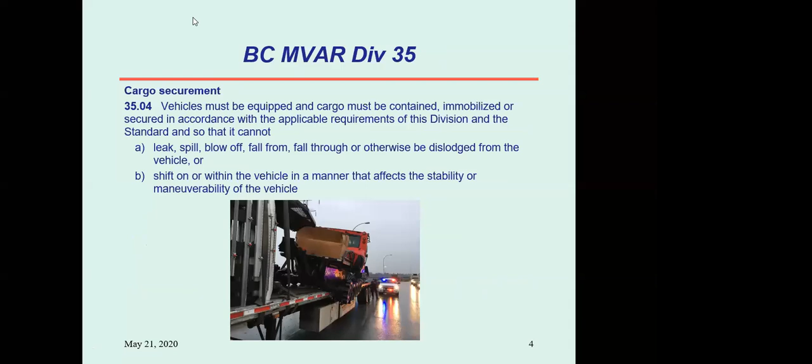There we go. Does that work now? Okay, perfect.

So what we're going to go through today is just a very brief presentation. We only have an hour, and normally the cargo securement program would take several hours or a day or two. So this is just a brief overview, and you're certainly welcome to contact me or any of my colleagues throughout North America. We actually all use the same cargo securement rules. National Safety Code 10 is federal, and it is part of the North American Cargo Securement Agreement that was signed by Canada, the United States, and Mexico back in 2004. So theoretically, all states, provinces, and territories in North America are using the exact same rules for cargo securement.

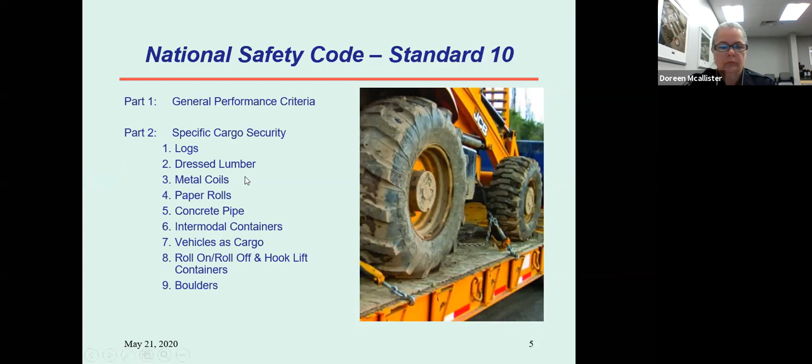One of the things we always want to keep in mind when we're on our way to pick up a piece of freight is what it is. Is it going to be skidded inside an enclosed trailer like a van or a reefer? Or is it going to be a skidded load on an open deck? Or is it just going to be a whole bunch of miscellaneous bits and pieces that we need to consider when thinking about our cargo securement in advance?

The other things we need to think about when loading our cargo is how heavy it is, how big it is, and we need to make sure when we load it on or in the trailer that it's neat and tidy so it can be secured quite easily.

Some considerations we need to think about are where we're going to tie the load to, what we're going to secure it with, whether it's inside an enclosed vehicle or on an open deck, whether the securement device or system we've chosen will be effective, and whether we need some dunnage or spacers on our load.

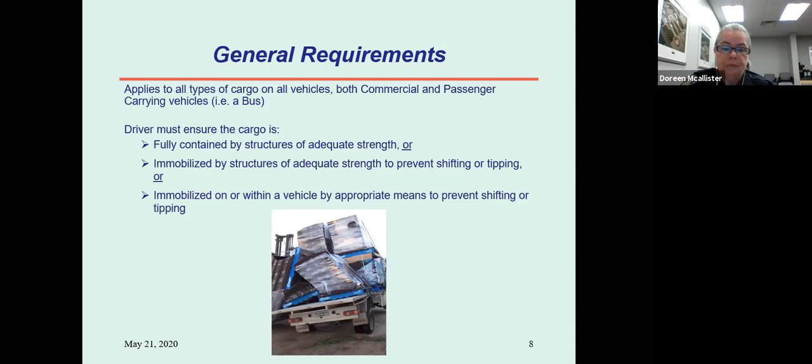Vehicle structures, floors, anchor points, headboards, bulkheads, stakes, posts, and pockets all need to be strong enough. If you've ever looked at a newer trailer, older trailers have them too but they've probably worn off, near the VIN plate or by the dolly legs there's a placard stating the working load limit or working strength of all the pin pockets, winches, and hooks. That will help you determine what you need to do for your cargo securement.

Your cargo securement method must be suited to the type, size, and shape of the cargo. For example, you might not want to use chain if you're hauling peat moss, because the chain will go right through the peat moss bag, as an example.

Tie downs have to be capable of being tightened by the driver, both at the beginning and as the freight is carried down the road, the driver needs to be able to tighten them. Tie downs need to be inside of the rub rails whenever it is practicable to do so.

The rub rails are actually built for protection of your cargo securement. You don't want your straps to get rubbed off when somebody sideswipes you, so you have your straps on the inside of the rub rail whenever possible. You're also going to want to think about whether you need to use some edge protection to protect either your strap or the freight from being damaged.

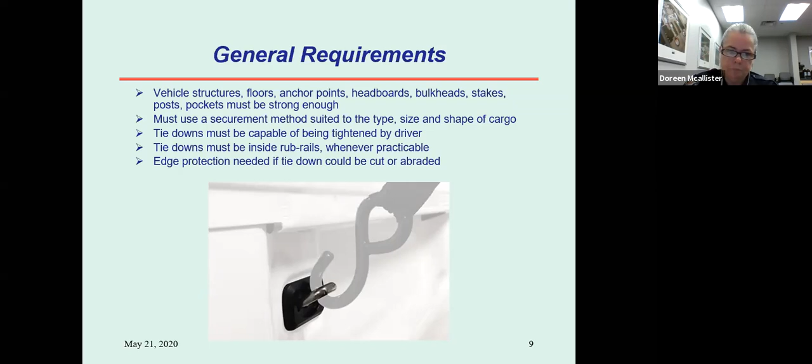A big part of cargo securement is actually a fight against gravity, or in conjunction with gravity. We want to make sure we're preventing our cargo from moving, with at least 20% G-force up. That could be just a tarp on your gravel or a cargo net if you've got stuff in the back of your pickup. We want to protect against 80% forward, 50% rearward, and 50% sideways G-forces. Don't be too concerned with these numbers, however. If you have the right number of cargo securement devices of the right working load limit, then you will meet or exceed the minimum G-forces.

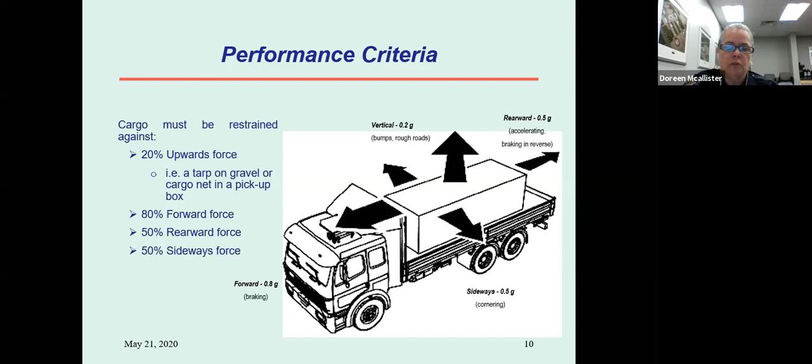Working load limit is something we talk about a lot in cargo securement. It's the maximum load that can be applied to a component of cargo securement during normal service, as assigned by the manufacturer. In the top left picture, you can see a working load limit tag on that Kinedyne strap. Web straps generally have either a tag or it's embedded right into the stitching, using a different colored thread. Sometimes they use both. It's important to note that if we cannot read the working load limit on your strap, we have to count it as a zero. It can still be used, but not as primary securement.

That center picture is the side of a boomer. Boomers all have working load limits written on them as well. The picture in the top right corner is from the front of a trailer. The owner or driver of that trailer knows the working load limit for the chain tie downs on this trailer, which had tie downs embedded right into the deck. Each one of those has a working load limit of 5,400 pounds, for example.

The bottom right corner is a chain that has a working load limit tag on it, and we can read that it's good for 1,635 kilograms. If you look at the chain in the bottom left corner, you can see a tiny nick. In real life, that nick is actually a number, and it tells us what grade of chain that is. Actual chain is the only component that does not have to have a working load limit written on it, because we have a formula for figuring that out, which we'll show you in just a couple of slides.

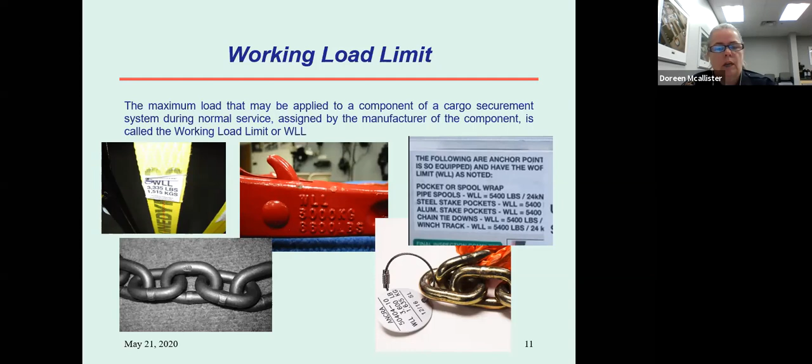The working load limit of the tie down is the lowest working load limit of any of the components and the anchor points. So if the anchor point is good for 5,000 kilograms and the strap is good for 6,000 kilograms, the working load limit for the tie down is 5,000, because that's the lowest of all the components. The aggregate working load limit of all the tie downs used to secure the articles must not be less than half the weight of the articles. So if you want to tie something down that weighs 5,000, you have to have a working load limit of at least 2,500 - half.

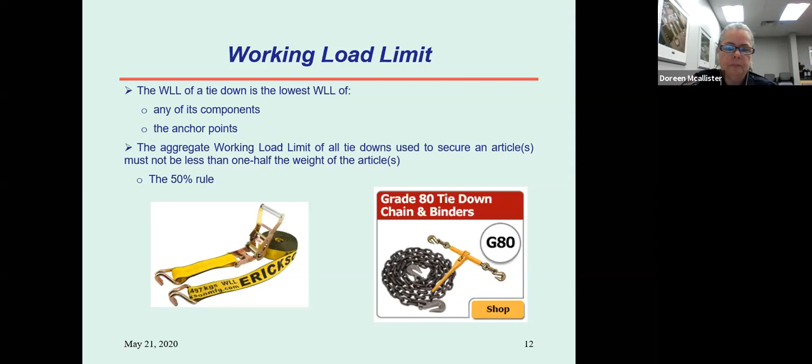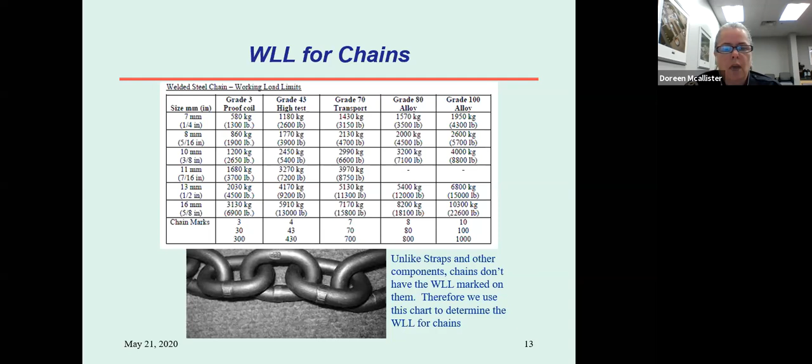For example, if I stop you and you're hauling an excavator, let's say, and you have half-inch grade 70 chain, I know that each one of those grade 70 chains is 5,130 kilograms. So I add up how many chains you've got - let's say you have 4 chains. That would be just over 20,000 kilograms. So the excavator can't be more than 40,000 kilograms.

If you're using a snap boomer for your chains, you need to make sure that the snap boomer is tied closed, either with the tail of the chain, shoelace, haywire. You can get clips that look like oversized diaper pins, carabiner, anything. You just need to make sure that the snap boomer cannot inadvertently open while you're driving down the road. There's nothing in the legislation that prohibits the use of snap boomers. I know a lot of you are in the oil field, and some of your customers may tell you that you cannot use them, and the customer is always right, so that just means you can't use them on their freight or their sites, but there's nothing in law that prohibits you from using a snap boomer.

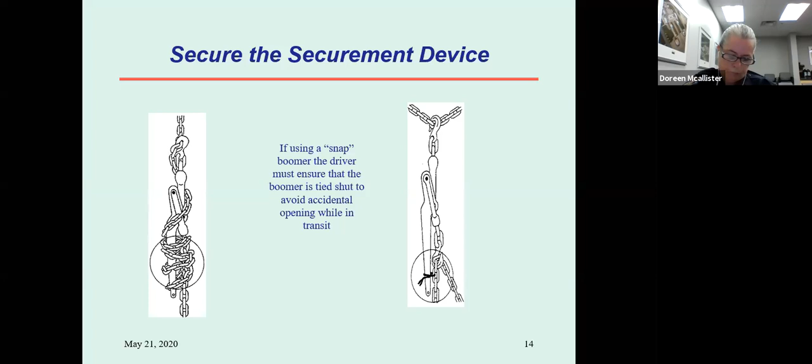So have you or anybody in your organization ever had anything come loose while you've been going down the road?

So it looks like about almost 50% of you have had something come loose while you've been going down the road, and so you know what it's like. It's a bit of an eerie feeling. I know I've had things come loose when I was driving on the highway, and I've certainly seen a lot of it since I've been working for CVSE. It does happen. We just try our best, and we know that you try your best to make sure that it doesn't happen through fault of your own.

So one of the things you need to make sure of is you have the right number of tie downs. We know we have to have 50% working load limit, but we also need a minimum number of tie downs, because we have to cover both weight and length. If the piece of cargo is shorter than 5 feet, and lighter than 500 kilograms, it only needs 1 tie down. If it's 1.52 meters or less in height, and more than 500 kilograms, then you need 2 tie downs. If it's more than 1.52 meters in length but less than 3.04 meters, you need at least 2 tie downs. And if it's more than 3.04 meters, which is 10 feet, you need 2 for the first 10 feet and 1 for each 10 feet after that.

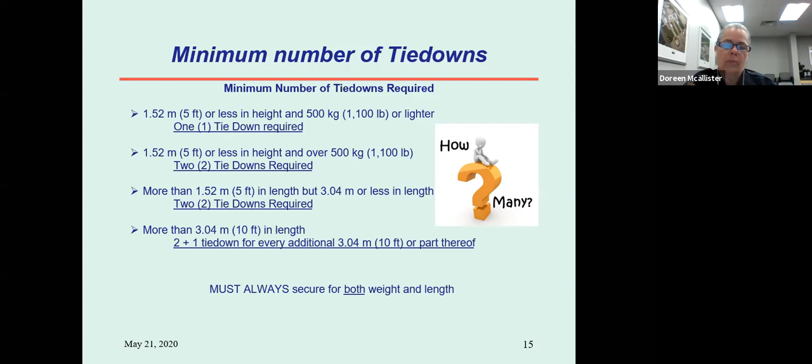You always must secure for both weight and length. An extreme example of that would be a 7-meter piece of PVC pipe that only weighs 30 kilograms. Because it's 7 meters long, you're going to need at least 4 tie downs, because you need 2 for the first 3.04 meters and 1 for each 3.04 meters after that. So that would mean you need at least 4 for that 7-meter piece of PVC pipe.

So as an example, if you have a box that's 5 meters long and weighs about 400 kilograms, how many tie downs will you need?

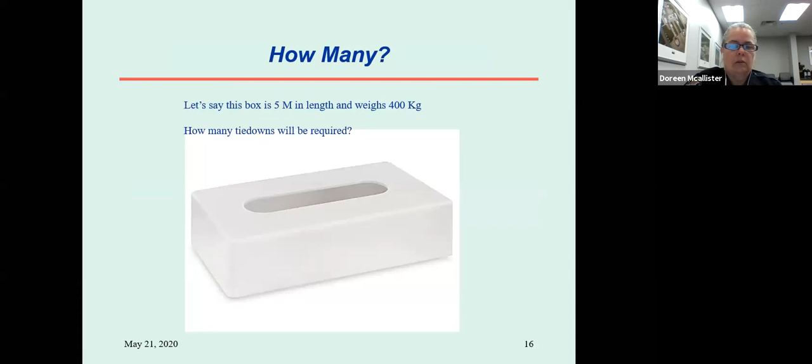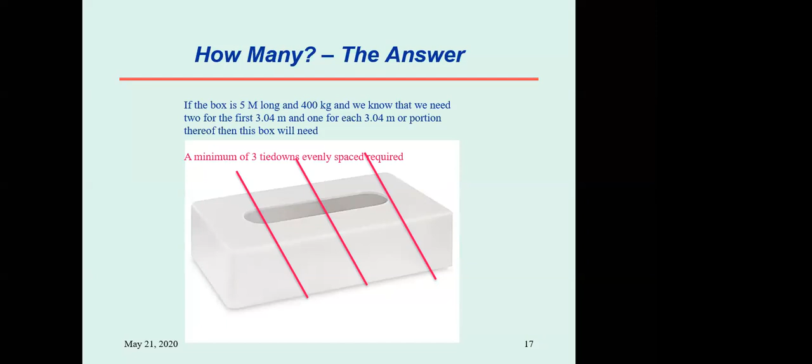So for all of you that thought you needed 3 tie downs, you are correct, because 3.04 would cover the first 2, and then less than 3.04 until you get to the 5-meter mark of how big this box is. That gives you 3 tie downs.

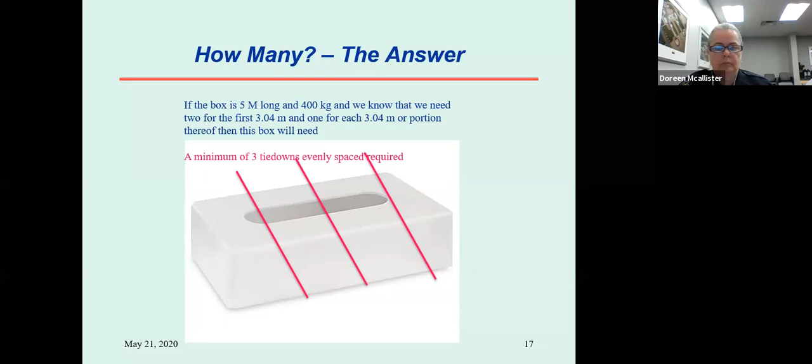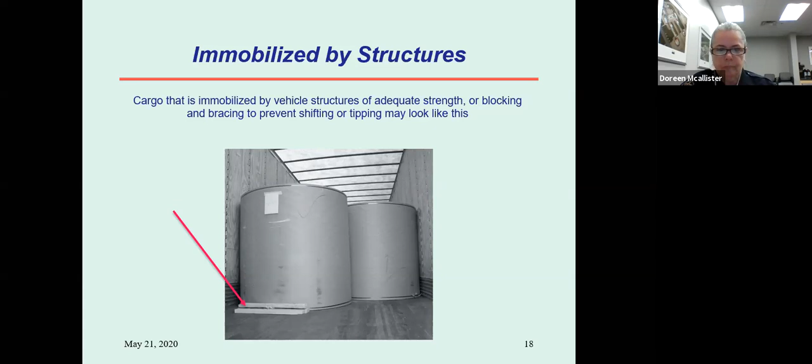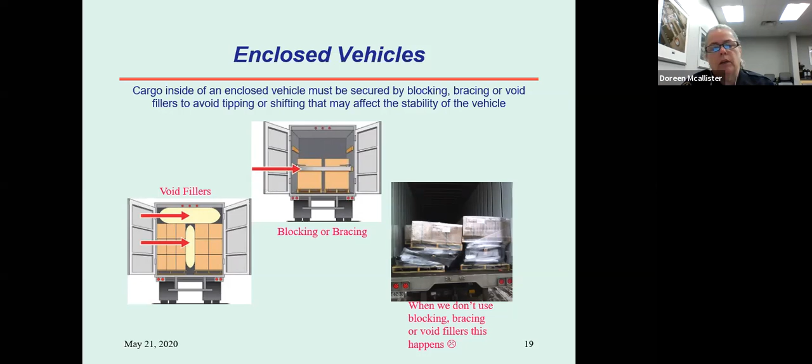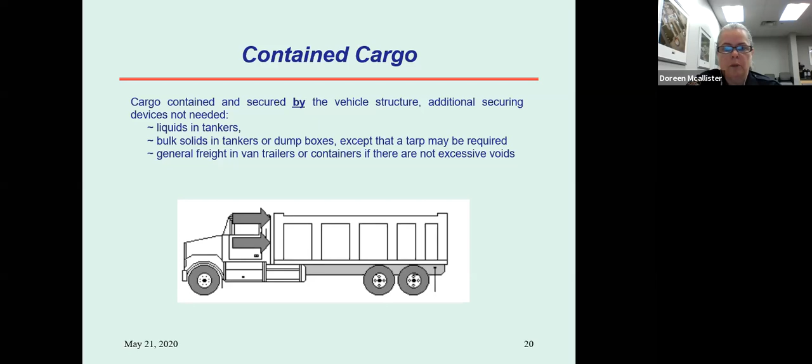Cargo that is contained and secured by the vehicle structure often doesn't need any additional securement devices. For example, liquids in tankers, bulk solids in tankers or dump boxes, except that a tarp might be required if it's in a dump trailer. In general, freight in van trailers and containers when there are not any excessive voids. So you have a 102 trailer and you've got a couple of skids side by side. You're not going to have any excessive voids, because that's why we build the skids the size that they are, so that they fill up when they're placed side by side.

Cargo that is fully contained by structures of adequate strength doesn't need the additional cargo securement, except, as I said before, you might need to be putting a tarp on your aggregate.

Doreen, there's a couple questions on the chat there. One is, what's better, chain or straps? How do we ensure chains are correctly checked for damage?

As far as chains or straps, which choice you get, it's going to depend on what the cargo actually is. There's nothing in legislation that says that you must always use one or the other, with the exception of crushed cars. Crushed cars, you must use either chain or cable. You cannot use strap. Other than that, it's really a driver's choice, and lots of times it's going to depend on what the actual cargo is. Like I said, you're not going to put chain over compressed bags of sod, because you're just going to break that plastic, and the sod is going to be all over the place and not on your trailer. You're going to want to use straps and dunnage or corner boards. So it really depends on what it is that you're hauling.

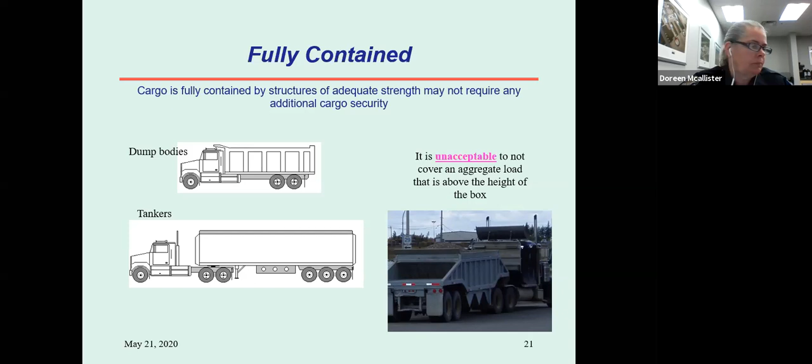Okay, thanks. I'll let you summarize the other questions at the end of your presentation or wherever it's convenient. Okay.

Cargo that is restrained against movement in at least one direction by vehicle structure, such as the headboards or bulkheads, you would reduce the number of tie downs by 1, but you still have to have at least 1. So if the skid or other cargo is abutted against a rated bulkhead or abutted against another piece of cargo, if you've got 2 skids, one in front, one behind, the second one is abutted against, is touching the one in front of it, it would only need 1 tie down. The front one would need 2, but the second one would only need 1.

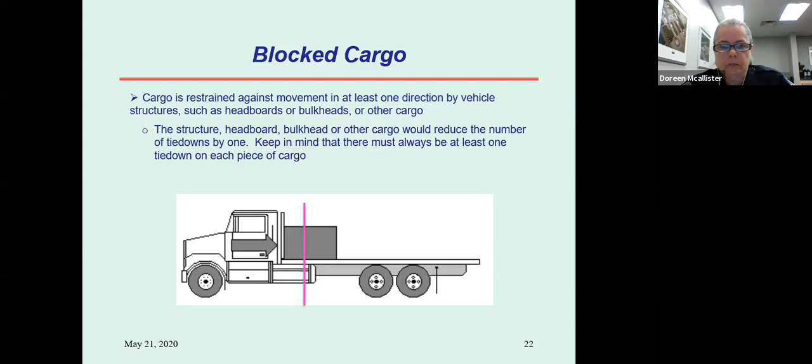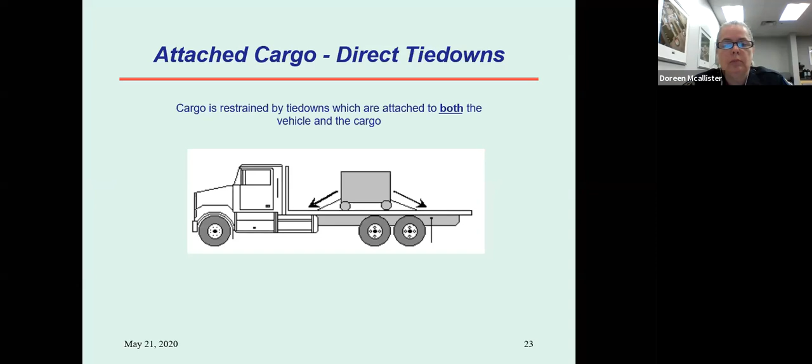Sometimes in cargo securement, you will hear us use terms like direct tie downs and indirect tie downs. So just a really quick definition: a direct tie down is tied from the cargo to the vehicle. An example of that would be integral locking devices, for example, in a garbage bin or an intermodal container.

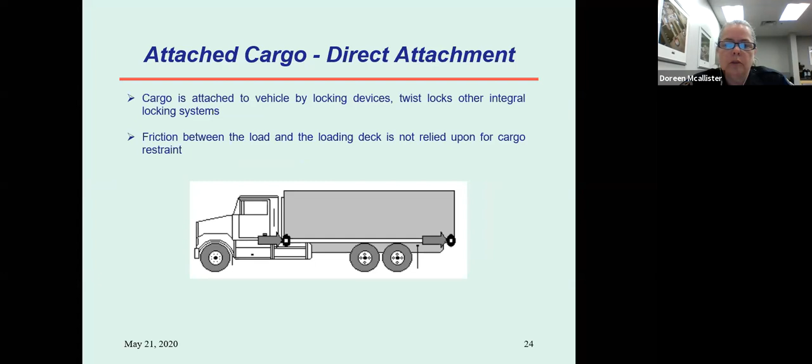The friction between the load and the loading deck is not relied upon for cargo securement. We use the integral locking devices as direct attachments.

Indirect tie downs would be where you put the tie down over top of the cargo or through the cargo and hold it down to assist against the G-forces, ensuring that the load does not fall from the vehicle under normal operating conditions. It's important to remember that cargo securement requirements apply up to the point of impact.

If something tragic happens and your cargo falls off after the incident, unless we determine that the reason for the incident was because the cargo was not secured appropriately to start with, you're not going to get in more trouble if it fell off after you crashed.

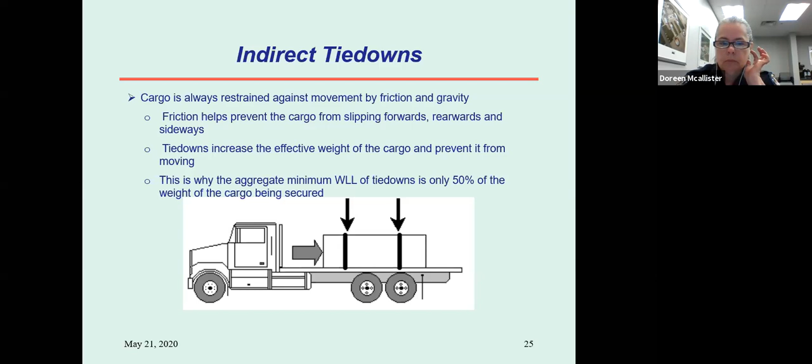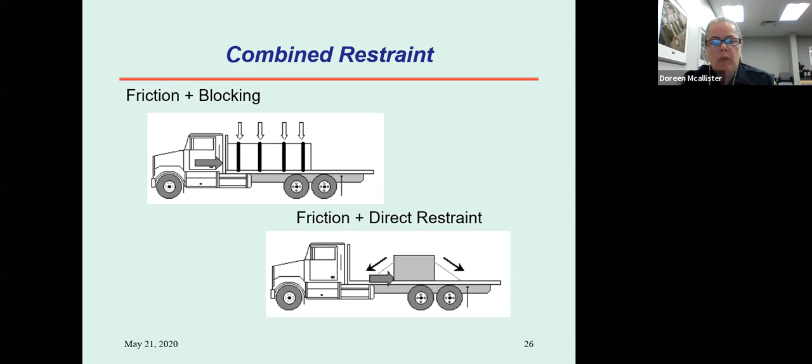So combined restraint would combine blocking and friction, or friction and direct restraint. The important part is to remember that you don't want it moving while you're going down the road.

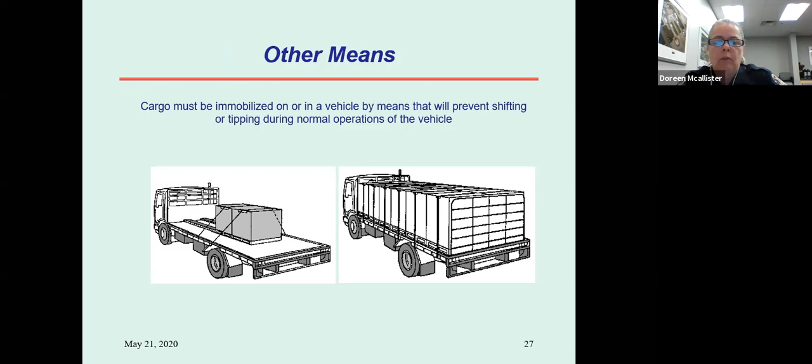Other means could be inside of bins. The picture on the right-hand side there is bulk bins, so there's cargo inside of the bins. They are tied, they can't leave the bin, and then the bin is tied down.

The important part is to remember that there are the right number of tie downs with the appropriate working load limit.

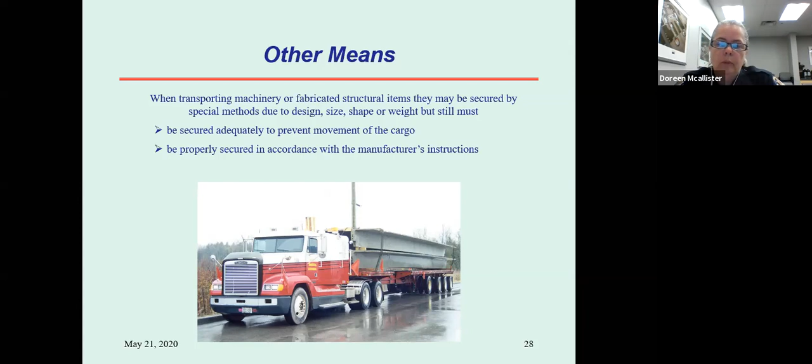So rub rails are something that people really need to pay attention to. I'm sure that you've all seen trailers that have rub rails that are a little bit wibbly and wobbly, and that's generally because people have tied to the rub rails in the past and it has bent the rail.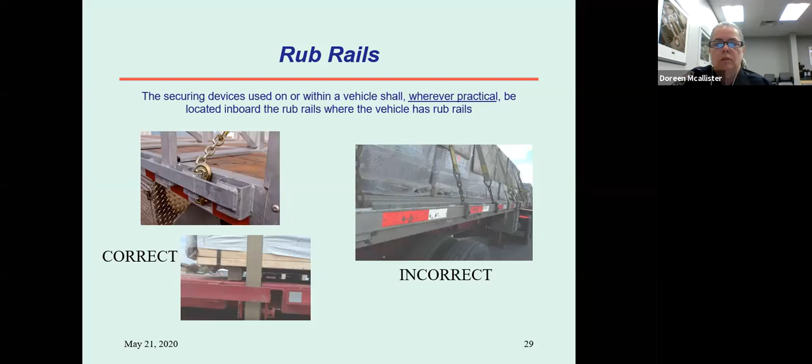So you always want to make sure whenever it is possible and practicable that you've got the hook on the posts on the stake pockets, or if you have to, put them down onto the frame, and you always want them inside of the rub rail whenever possible so that the strap or chain doesn't get damaged or hit when somebody sideswipes you on the Highway 2 between Calgary and Edmonton.

So single articles of cargo are fairly easy. It's the pallets of miscellaneous things that make it a little bit more complicated sometimes.

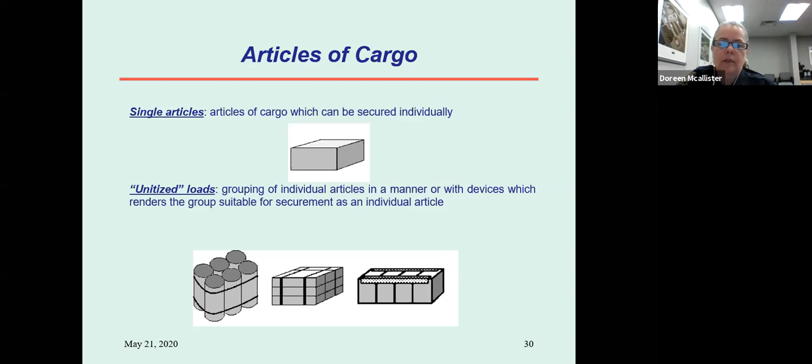But what you can do is unitize that skid of freight by some banding. That heavy duty poly that lots of places use will make it one article and make it a lot easier to tie down. That way, it'll make that skid of brick, for example, much easier to tie down.

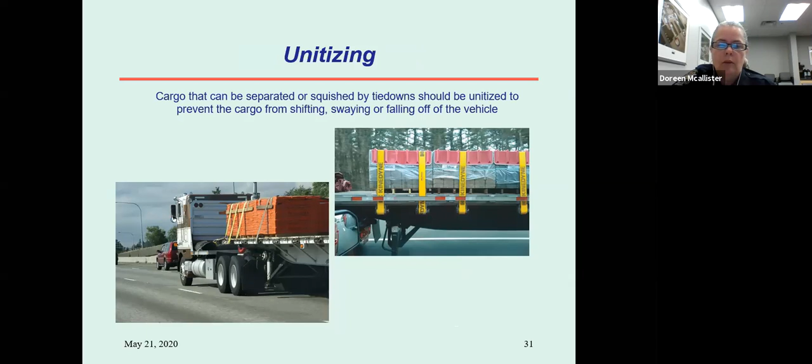If you look at these two pictures, in the picture on the left, he's got some boards tied together with some old straps, and that's unitized the load. In the picture on the right, he's got some corner boards that he's using to unitize that brick, plus it was poly wrapped, so that way it's just one skid rather than 18 pieces of brick that you're trying to tie down.

When the articles are round, that's when you really need to make sure that they're blocked and braced. So this would be for pipe and paper rolls, coil rolls. You want to put some blocking or bracing on the bottom to prevent it from rolling.

And this is one of the times when we do want to see a 45-degree angle on your chains. Straps generally aren't going to be used on this type of freight, and that's just because it's too easy for the straps to get damaged, and also they might not be heavy enough depending on what it is that you're hauling. Chains are just sometimes easier with these types of things.

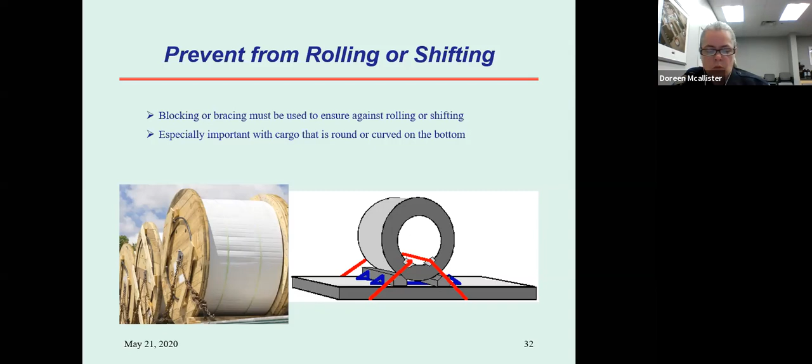But you're going to want to put some corner boards or some edge protection. In this example on the right-hand side, the edge protection is actually protecting the freight, not the chain. You don't want to damage your client's product that he's paying you to haul.

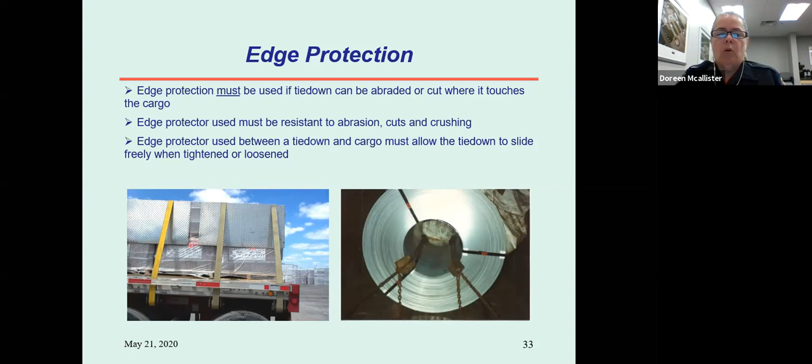Edge protection is used to prevent abrading of your straps. It can be anything, like what's shown in these examples. The one on the right is actually some old straps that have been folded up. You can use carpet, or buy plastic or metal corners that go under your straps. Anything at all that will prevent your straps from getting cut while going down the road or tightening your load.

Tie downs need to be able to be tightened, and the driver must be able to tighten them while en route. Tension requirements do not apply to steel strapping because those are fused together. Steel strapping is only used for unitizing cargo anyway, not as the primary means of cargo securement.

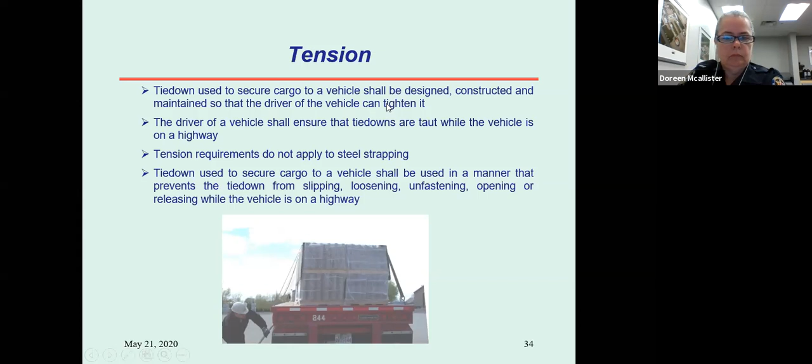The driver needs to stop and check his cargo securement at fairly regular intervals. Within the first 80 kilometers of the trip, he needs to stop and check that everything is still the way it was when he left the yard. Then at each change of duty status, after 3 hours of driving or after 240 kilometers, the driver needs to stop and check all of his cargo securement, making sure the load is still not falling off or out of the vehicle.

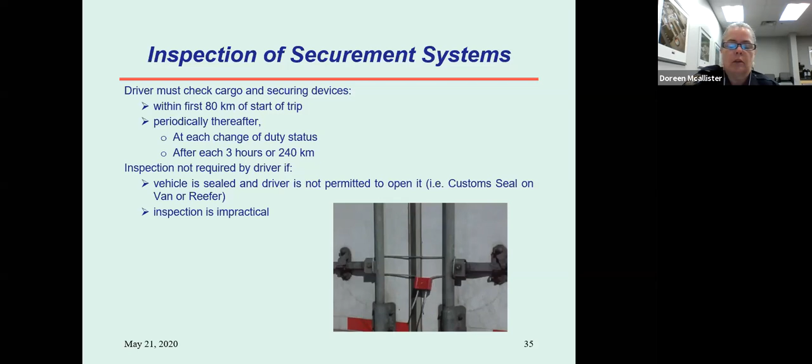There are a couple of times when a driver is not required to. One is if they're hauling an enclosed vehicle, a container, van, or reefer with a US or Canada customs seal on it - the driver is prohibited from opening that seal because of immigration or freight rules with customs. Or if the inspection is impractical, for example if you're hauling a tank.

That concludes all of part one. The next few slides cover cargo specific commodities. The first one we'll look at more closely this morning is lumber, which is section 46 in the NSC 10.

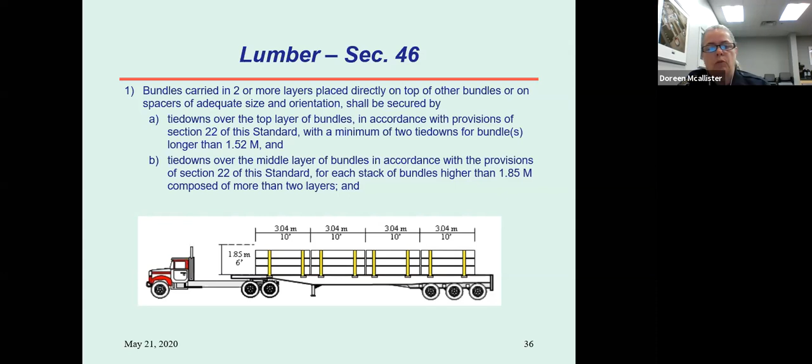However, if you look at this picture, there are 3 lifts of lumber. So the bottom two lifts are tied, and then the top lift is tied as if the other ones weren't even there.

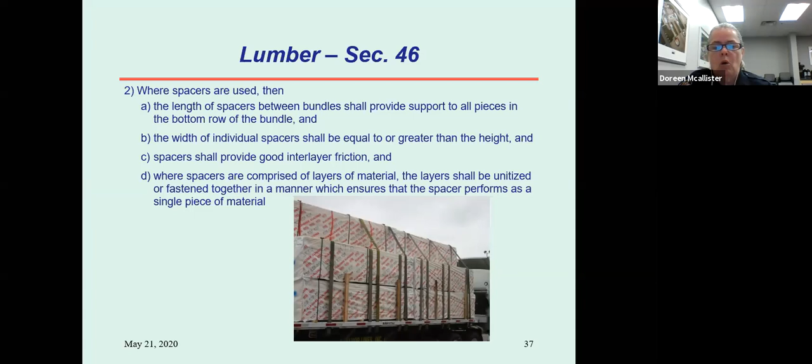If spacers are used in between the lifts, you need to ensure the spacers won't compact and that they're at least as long as the freight they're spacing. For example, you wouldn't want spacers underneath this 12-foot lumber that are only 8 feet long or wide. It needs to run from one end to the other, or from one side to the other, if spacers are being used.

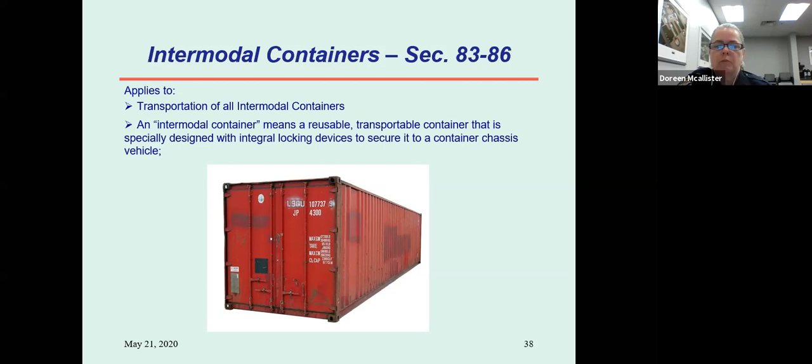Intermodal containers, otherwise known as CANs to everybody else, are reusable and generally transported on container chassis, but not always. If you are hauling one on a container chassis, all four locks must be fully engaged.

For the majority of you here today, you're probably hauling lots of these intermodal containers on open deck trailers, flat decks or step decks. You need to ensure all four corners are fully supported by the vehicle if it's loaded. If it is empty, a maximum of 1.5 meter rear overhang is permitted.

If they're on an open deck trailer, they need to be secured by chains or wire rope on all four corners, or if you're tying to the top four corners - and I don't believe I've ever seen anybody tie to the top corners - that's one of the few times where cross-chaining is a requirement.

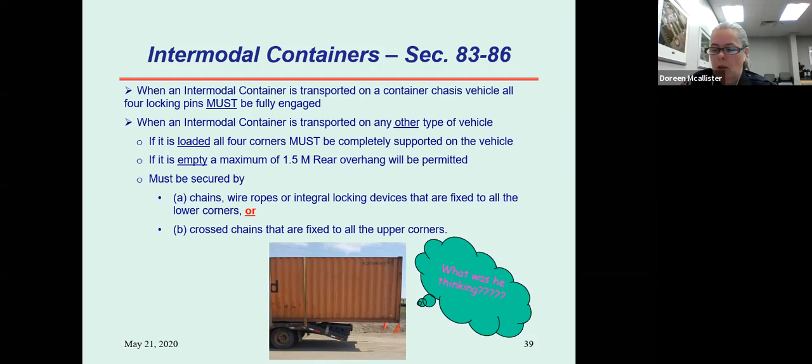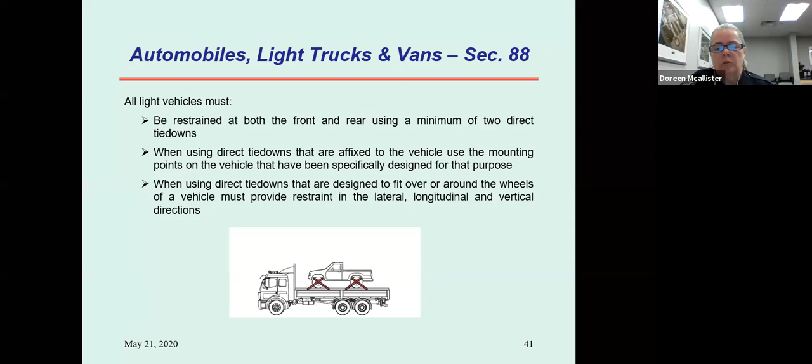So the tie-downs must be attached to the vehicle, to the mounting points that are specifically designed by the manufacturer for that purpose. If they are using the wheel socks, then they must also provide lateral, longitudinal, and vertical cargo securement.

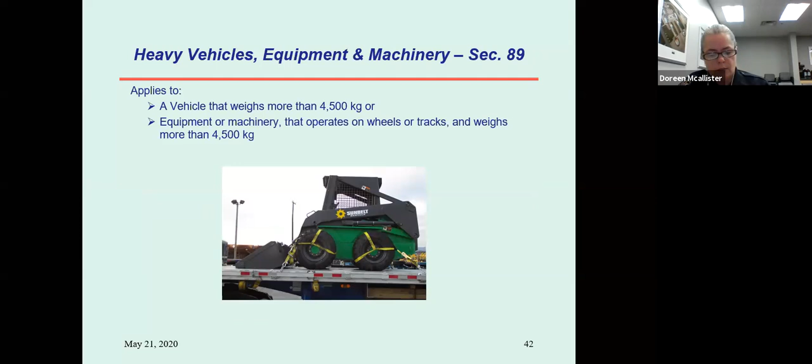Heavy vehicles are Section 89 in the NSC Standard 10, and they're for any vehicles that are more than 4,500 kilograms. And they include machinery that operates on wheels and tracks. They need to be secured with at least 4 tie-downs, and each one of those tie-downs must have a working load limit of at least 2,268 kilograms. The tie-downs are at the front and the rear or on the mounting points designed by the manufacturer. A lot of heavy equipment has actual load hooks built right onto them by the manufacturer.

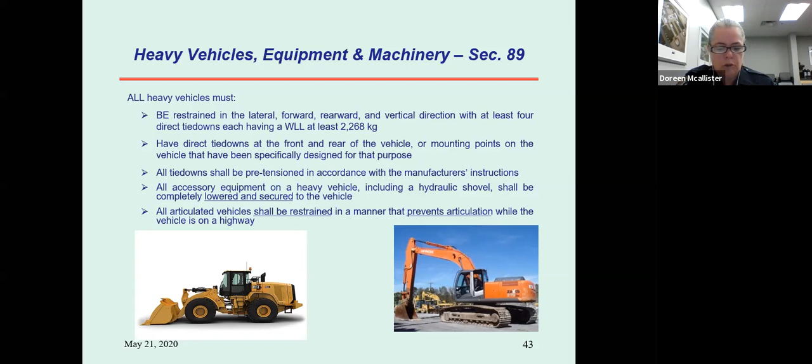Any accessory equipment must be completely lowered and secured to the vehicle. And if it has an articulation point, like the front end loader on the left-hand side or a rock truck, that articulation point needs to be locked with the pin. Or if the pin has been lost or missing, then you need to put chains through that articulation point. You don't want that piece of machinery bending on you while you're driving down the road.

Crushed cars are flattened cars, so they're not cubes, they've only been flattened by mechanical means, and they're on their way to the recycling place where they're going to strip them and separate them out.

Web strapping cannot be used on crushed cars. It must be chain or wire rope. Each one must have at least a working load limit of 2268 kilograms, and there has to be at least 4 on each stack. And then there has to be netting or some other device surrounding the load to ensure that debris doesn't fly off while you're going down the road.

Sections 94 to 96 of the National Safety Code Standard 10 are for roll-on and roll-off and hook lift bins. They have to be secured at the front with either the lifting device or the stops, and at the back within 2 meters of the rear of the container, they must have 1 indirect tie-down or 2 tie-downs secured to the side rail of the vehicle chassis and the container chassis at the same time, or 2 tie-downs lengthways securing the container to the vehicle side rails, or the 2 hooks that you'll see a lot on garbage bins. There's actually hooks at the back of the truck that hook onto the bin.

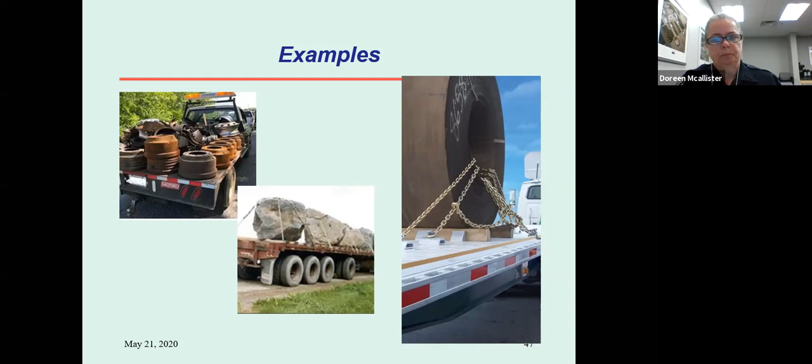So for all of you that said you did a lot of oil field work, if you happen to be a member of PSAC or CAODC, you can access this document. It's a copyrighted document that's available to all the members of those 2 organizations, and it's an industry best practice for cargo securement. It actually exceeds the minimum standards of NSC 10. One of the better things about this document is it has a lot of photos and examples from all over northern BC and northern Alberta. And the last I looked, there were about 100 different companies that were signatories on this document when it was originally written in 2006.

There's lots of information on our website, cvse.ca. If you go there, you can click on the National Safety Code Standard 10 document right from there. Also, the CCMTA website, Canadian Council of Motor Transport Administrators, has a lot of information including all the National Safety Code standards, including Standard 10. If you click on the link for Standard 10, there are about 4 different documents with frequently asked questions and some interpretation guides as well.

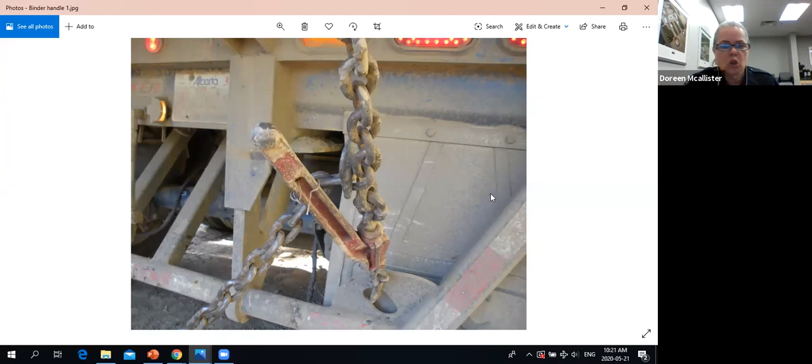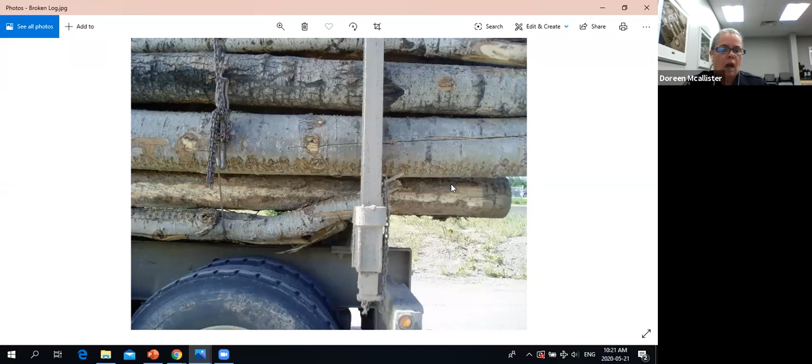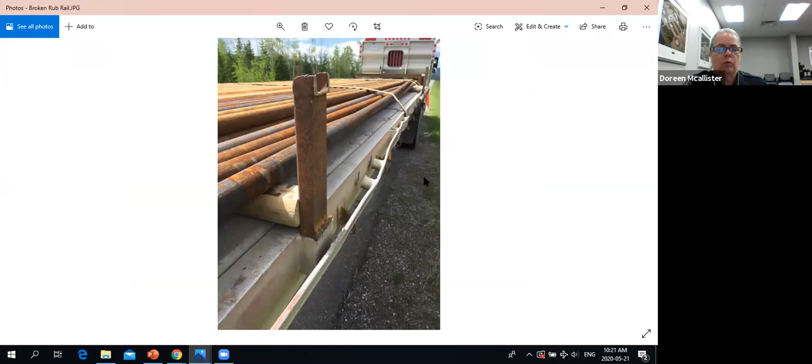I think you might have covered this already, but how often does a driver have to check the straps? Within 80 kilometers of initially loading the load, and then once every 3 hours, 240 kilometers, or change of duty.

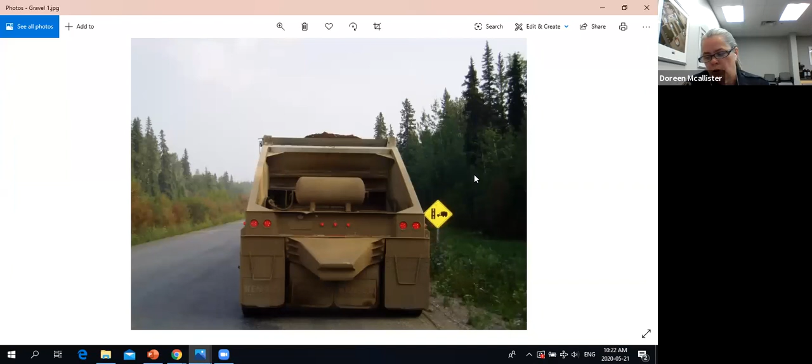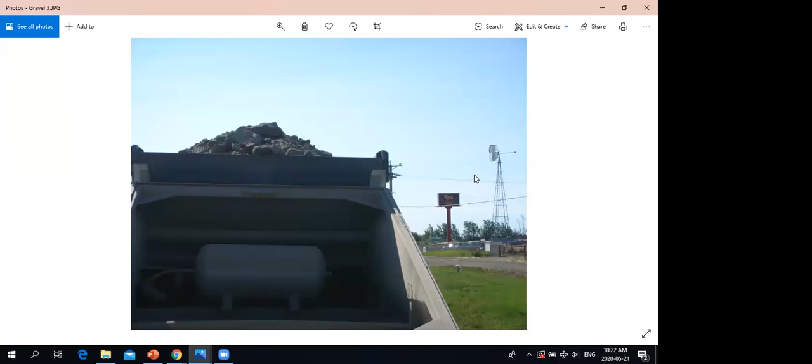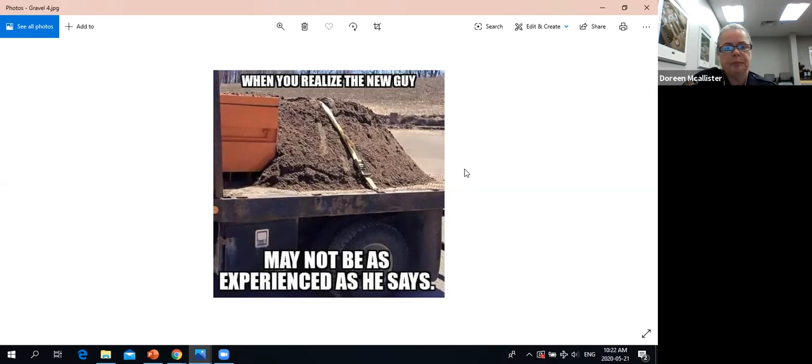On intermodal containers, how do you secure the contents inside? The same as you would inside of a van - blocking, bracing, shoring boards, void fillers, exactly the same way. It becomes tricky from the driver's point of view when it has a customs seal on it - they have to trust that the folks who loaded it did it properly. But otherwise, inside of a container it would be exactly the same as inside of a van or a reefer.

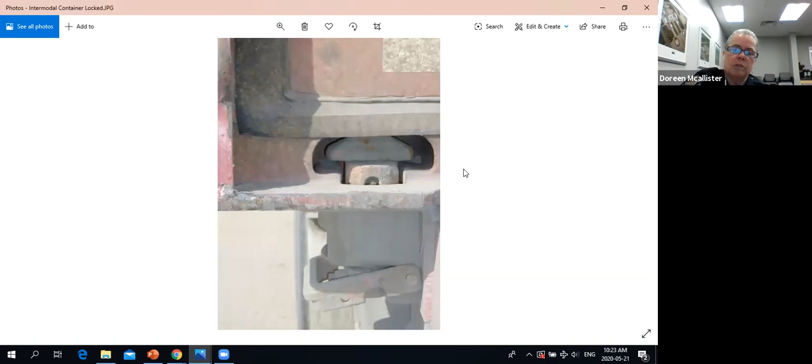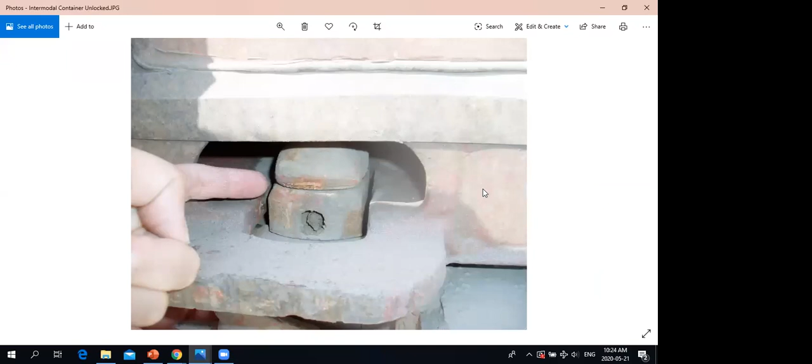For trailer or cargo anchor points, if there's no rating or placard, is a rating assigned?

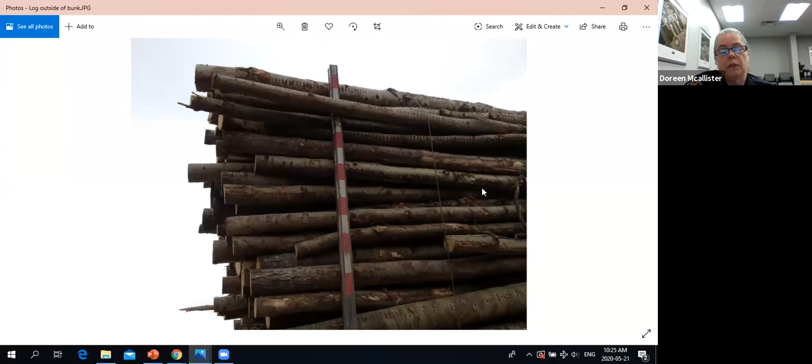On the anchor points on the trailers, if we can't find that sticker or embossment from the trailer manufacturer, we'll go to the trailer manufacturer's website to see what it may have been when it was produced, or try to find the line sheet. Honestly, we're only going to investigate that much if there's some obvious deformity or damage to the anchor point on the trailer. We're more looking, because we already know what those are rated for from the trailer manufacturers, at your straps and chains and boomers to make sure that they're rated.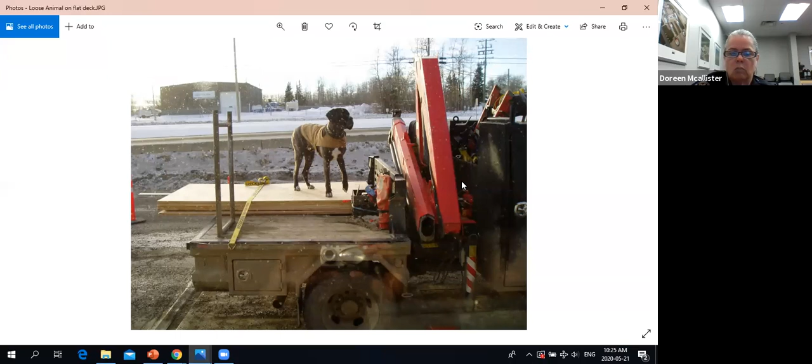Are the standards available online, or does one have to purchase them? Nope, the standards are available free online. If you go to ccmta.ca, Canadian Council of Motor Transport Administrators, or to our website cvse.ca, National Safety Code Standard 10 is available. You can probably Google it as well. It's one of the standards that is free. All of the National Safety Code standards are free.

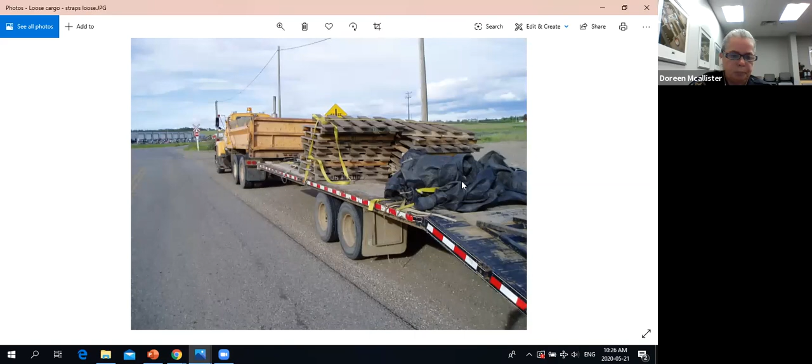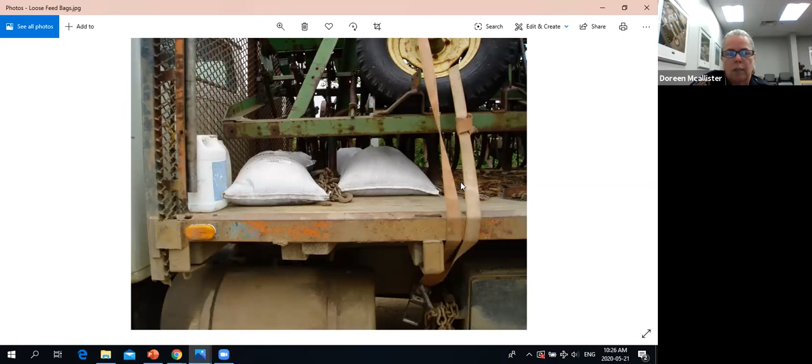Is cargo securement requirements only for commercial vehicles, or are farmers and landscapers supposed to be following them as well? All vehicles over 5,000 kilograms licensed weight must comply with NSC 10. If they are less than 5,000 kilograms licensed gross vehicle weight, then their cargo simply must be secured from falling, bouncing, blowing off of, shifting or tipping in the vehicle during normal operations.

The last question is, in your experience, how many cargo securements are done right versus wrong? I would say the majority are done either exactly correctly or mostly correctly. The oddball ones are like this one here - he simply got busy and forgot to throw a strap over that pallet in the middle of the load. He had all the rest of them right.

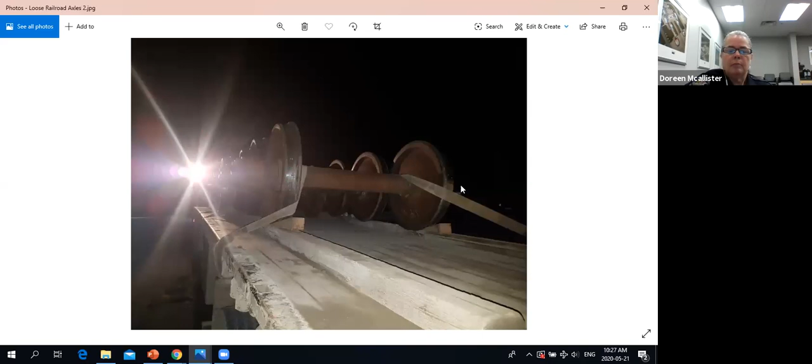Majority are done correctly, and lots of times the problems we find are that a strap was cut in transit, or the chain came loose since the last time he stopped.

The reason I've paused at this picture is I want to show you the next one. These are railroad axles, and he did have them blocked, but the blocking became loose, and when it did, the axles rolled. If you look, this is actually the front of this person's trailer, and that railroad axle actually fell off the front of his trailer and landed on the fuel tank of the truck. It's very, very important when hauling something round to ensure the blocking or bracing you're using is strong enough, and that the driver is checking it regularly, as well as the straps and chains, to make sure the cargo can't roll.

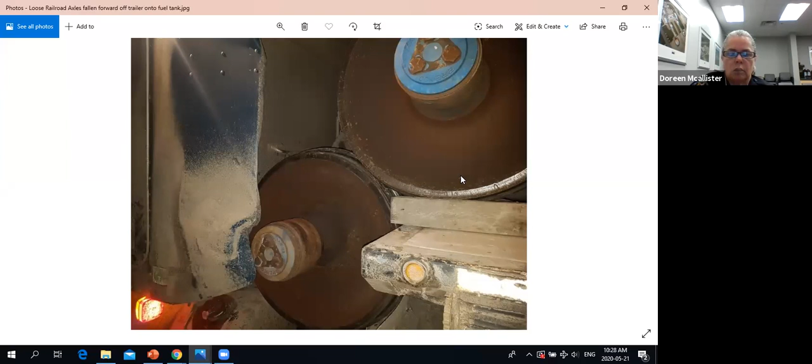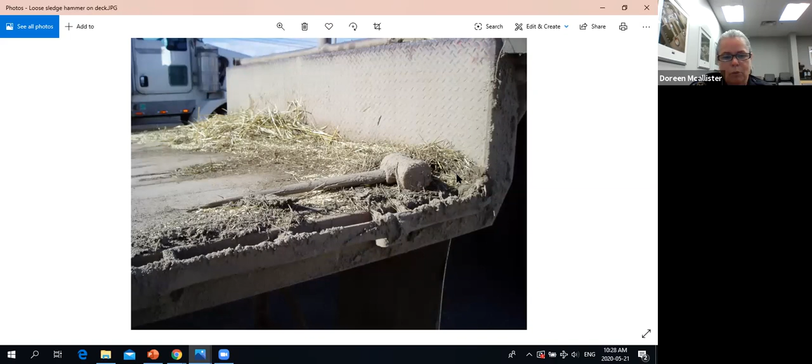So what are the major issues you see with cargo securement? This one right here - once a day we see a hammer or a snipe or a pair of gloves or a pair of boots. That's the most common. The second most common isn't so much cargo secured incorrectly as things that have come loose or shifted.

What are the fines for improper securement? Well, it's an out of service on the National Safety Code. In British Columbia, it's a $288 fine for the driver of a commercial vehicle and a $173 fine for the driver of a private vehicle.